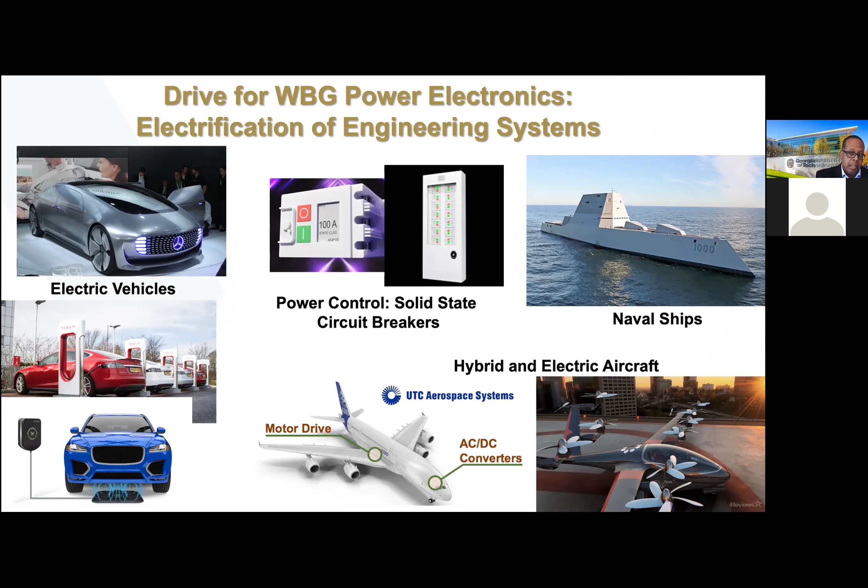We also understand that wide bandgap is being used for RF communications, so you're seeing a lot of that in areas like 5G, radar systems, and satellite communication links. There's also optoelectronics in terms of laser diodes and, of course, white light solid state lighting. I won't talk a lot about the solid state lighting portion today.

I will cover some of the developments going into pushing the technology for RF as well as power. So if I use this slide as a way of motivating, where are we trying to go with our power devices, and why do we need wide bandgap materials?

If you look at a power switch, when it's in the off state, you want it to withstand the voltage being applied without breaking down. It needs to have this infinite resistance, in an ideal state. But when you turn the device on, you need it to switch from that high resistance state to something that ideally would be very low or zero resistance, so that you don't dissipate power while the device is on.

Obviously, this doesn't happen. So during that switching state, you have power being dissipated. While the device is on, you have an on-state resistance that dissipates electrical power, and then in the switching off state, you again have this spike of energy being dissipated.

There's a lot that goes into designing circuitry, but also looking at materials that can minimize some of these losses. This state, when the device is on, is called the specific on-state resistance.

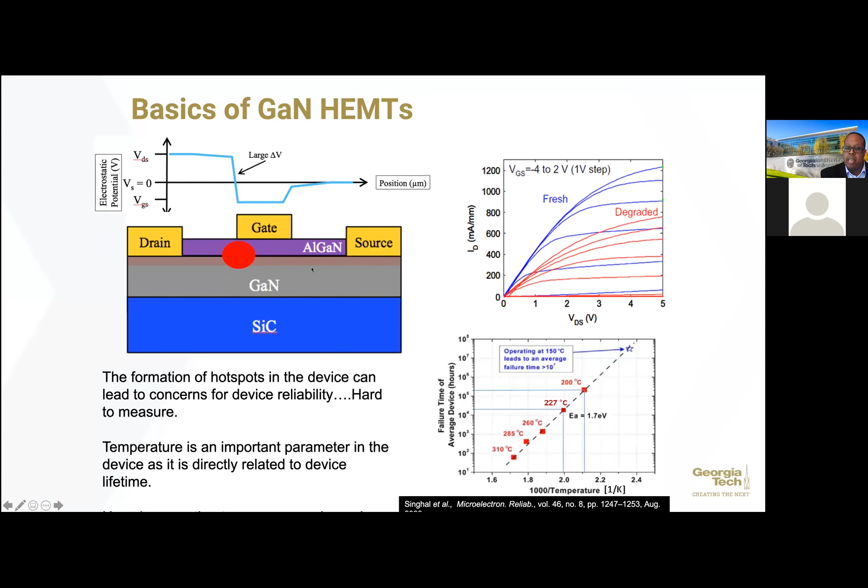What I'm going to deal with today is primarily starting here at the device level. I won't present any of the work we're doing on the packaging portion, and show you where the development of materials and the development of this device architecture really plays into the type of heating you'll see, such as this hot spot right here at the drain side edge of the gate.

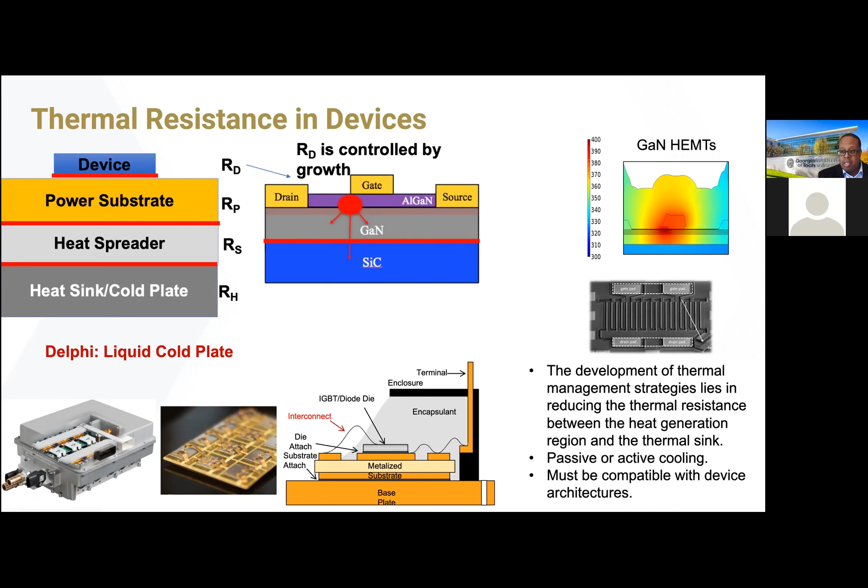This has been done for a while - Hiroshi Amano at Nagoya University in Japan, this is what he actually did in his PhD thesis in order to grow electronic grade gallium nitride. And this is part of the work that led to the Nobel Prize for winning the blue LED, which led to white light LEDs.

So this layer right here is very important that's being put into practice when they grow GaN on top of silicon carbide or other materials.

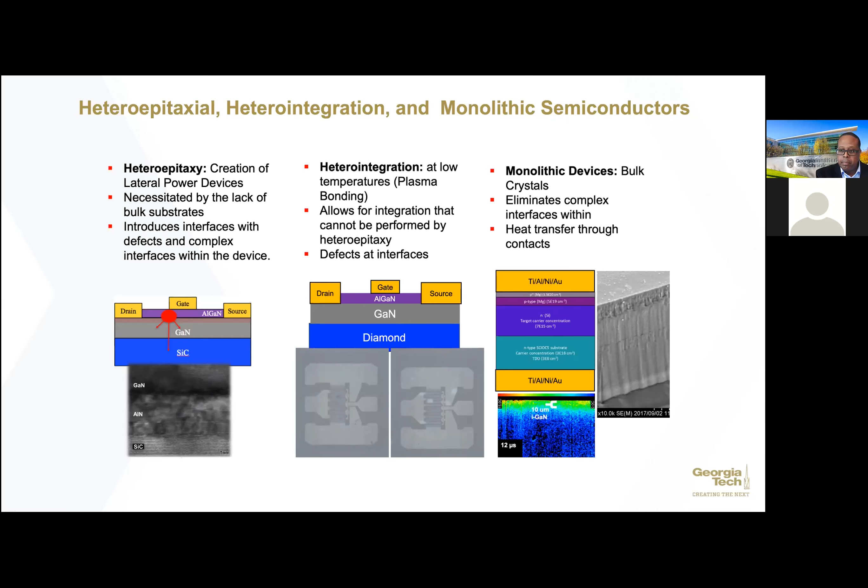So let's start into the materials and manufacturing challenges at the die level. One of the ones that we saw early on in some of our work, this is from one of my former students, Luke Yates, who's currently at Sandia National Labs.

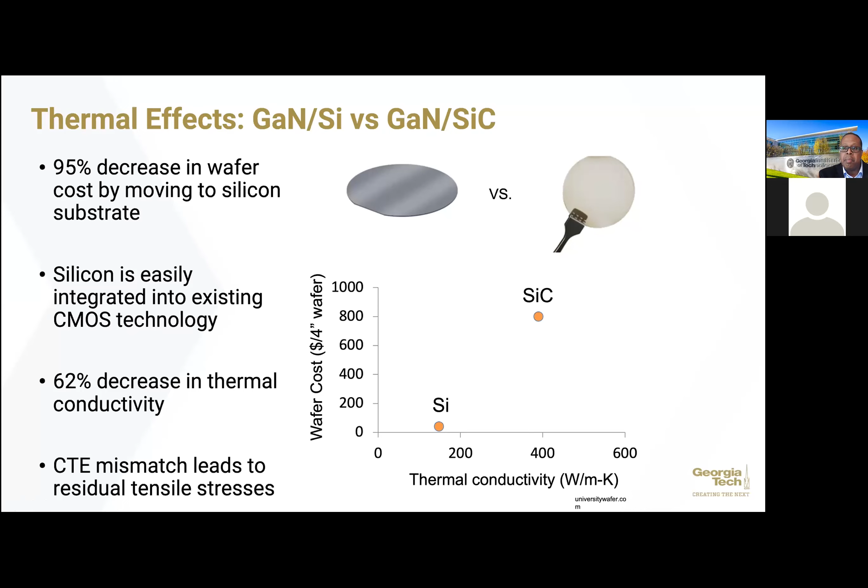But the issue is that the large tensile stresses can lead to crack formation. So it limits the amount of GaN that you can grow on top. If you grow it too thick, you'll actually get crack formation.

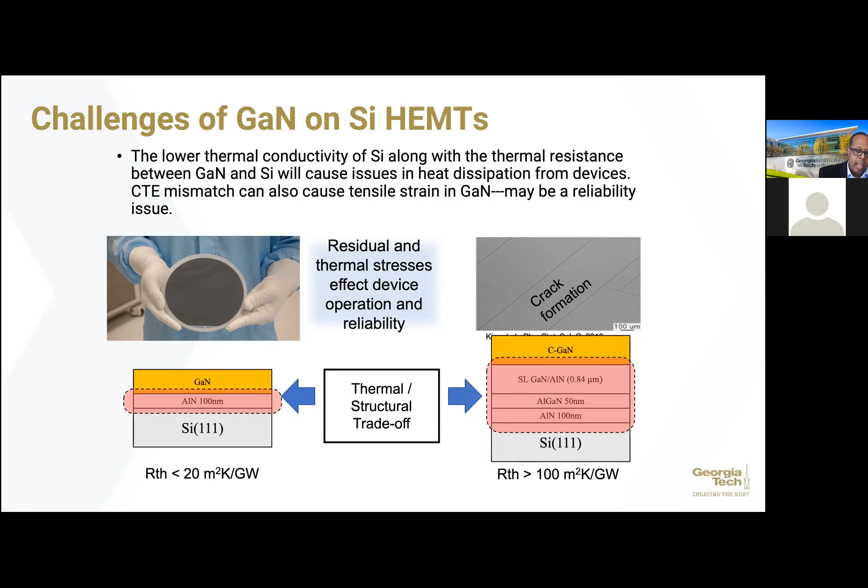So I can grow thick GaN with poor thermal resistance, or I can grow thin gallium nitride with very, very low thermal resistance, and I have to trade off the stresses.

So what we've been able to do, working with some commercial companies, is look at what happens as you grow gallium nitride on top of these superlattice structures, as well as on top of the aluminum nitride.

What I'm doing here is using Raman spectroscopy as well as photoluminescence. Why use those two measurements? Raman spectroscopy gives you the average through the thickness of the GaN. The photoluminescence gives you the stresses right at the surface. So I can begin to look at gradients, the stress gradients, in the material.

The other thing we worry about is that the AlGaN layer, which is about 20 nanometers right on top, undergoes what's called pseudomorphic growth, which just means the lattice of the AlGaN takes on the lattice of the gallium nitride. It's stretched.

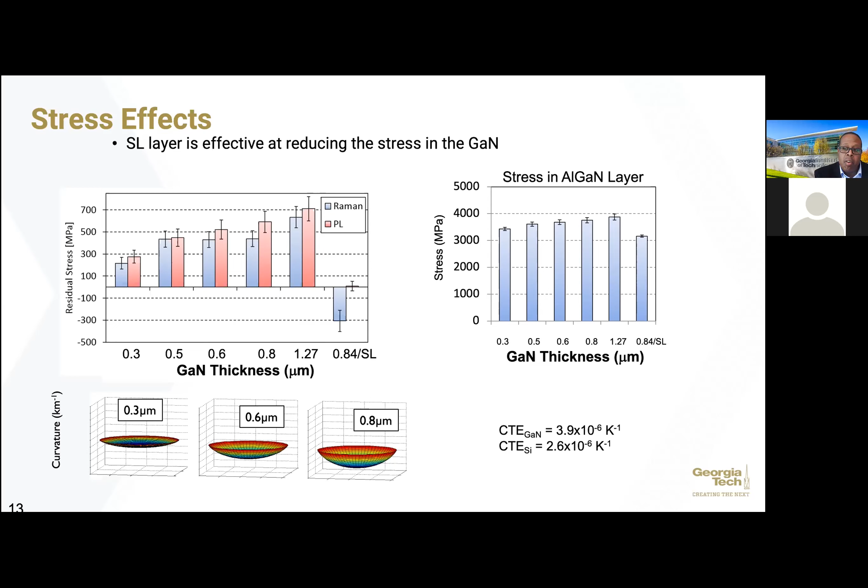That's all we need to know, that it's going to be under tensile stress. So we're basically calculating what the stresses are in the AlGaN layer and how it drops when you get to this pseudomorphic growth on top of the superlattice structure. These are things that are very, very interesting for us to go through to improve the overall reliability of the devices from a mechanical point of view.

So now let's take a look at what happens from a thermal point of view. Here we've used a two-finger device, with source, gate, and drain, a dual structure with two channels so we can do some measurements. These will be sitting on top of superlattice structures to see what happens.

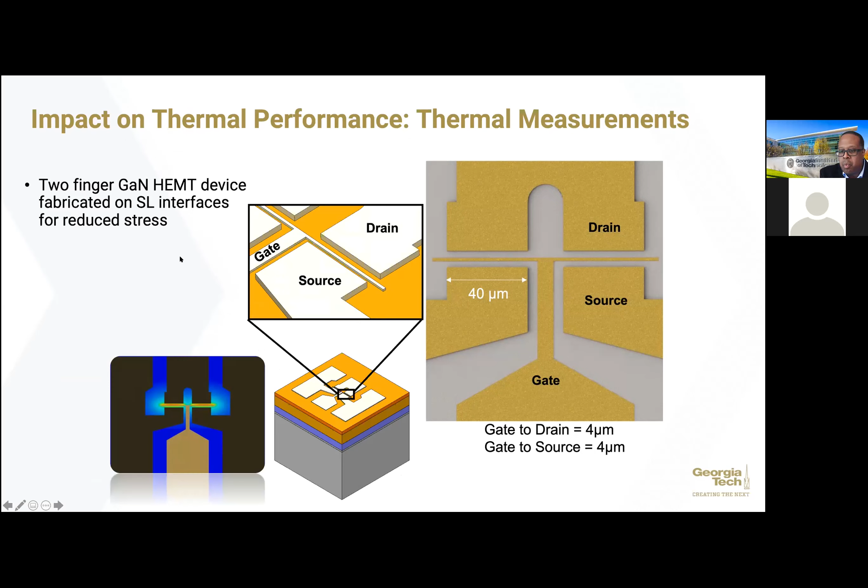We're going to use Raman spectroscopy, a nice technique to measure temperature. When I use Raman spectroscopy, I have a laser that goes through the material since it's transparent to my laser wavelength. I still get scattering with a peak for silicon, and peaks for gallium nitride, two peaks here. I can also put nanoparticles on top, which are TiO2, which don't impact electrical performance. This allows me to measure temperature right at the top of the device, all the way down at the silicon, and inside of the GaN. So now I get a vertical measurement of temperature through the device.

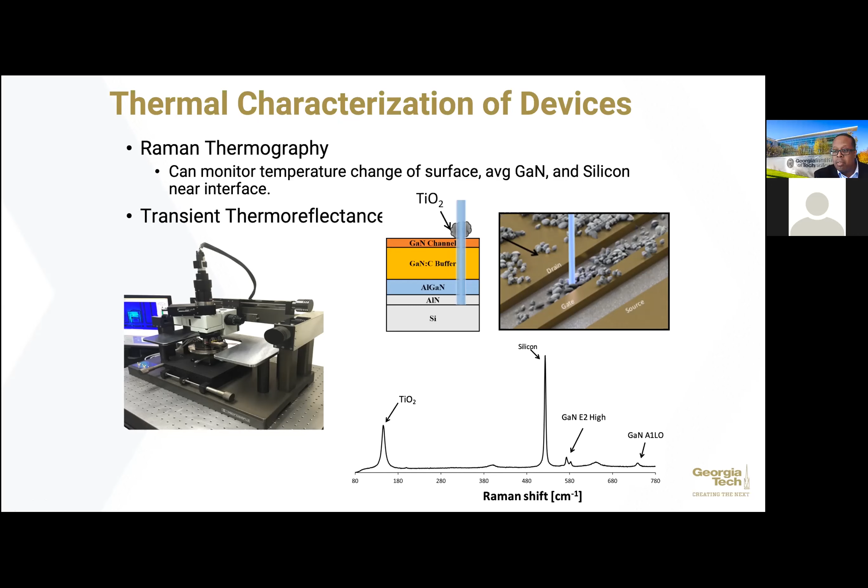Here's what's interesting. I have a 5 micron thick superlattice structure here, about a 2 micron thick GaN layer, and I'm powering this and increasing the power. When I use Raman spectroscopy, I can see the temperature rise in the silicon. Using the same technique, matching the fingerprint to the GaN, you see a much larger temperature rise in the GaN. This is quite interesting.

When I look at the top temperature of the TiO2, this is what you see. The temperature at the very top is slightly larger than the average temperature, which is what we expect. But there's this huge drop between the gallium nitride and silicon, and we believe that's coming from this superlattice structure.

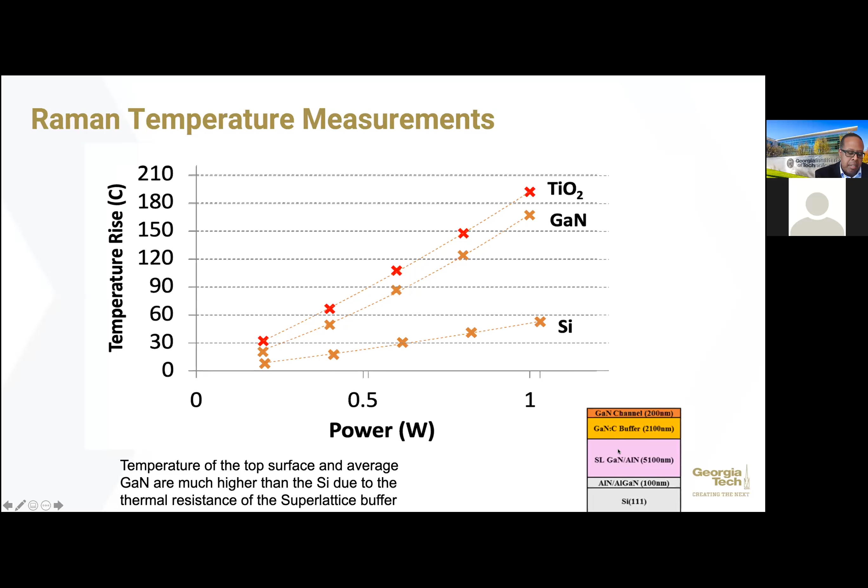So going through modeling and some measurements, we measure the thermal conductivity of the superlattice structure, and it's very low, on the order of 7 watts per meter K. We measure the thermal conductivity of this thin gallium nitride layer, on the order of 104 watts per meter K. Putting that into a model, you see a reduction in temperature between the two. So if I have a superlattice structure, it's going to be hotter than if I don't.

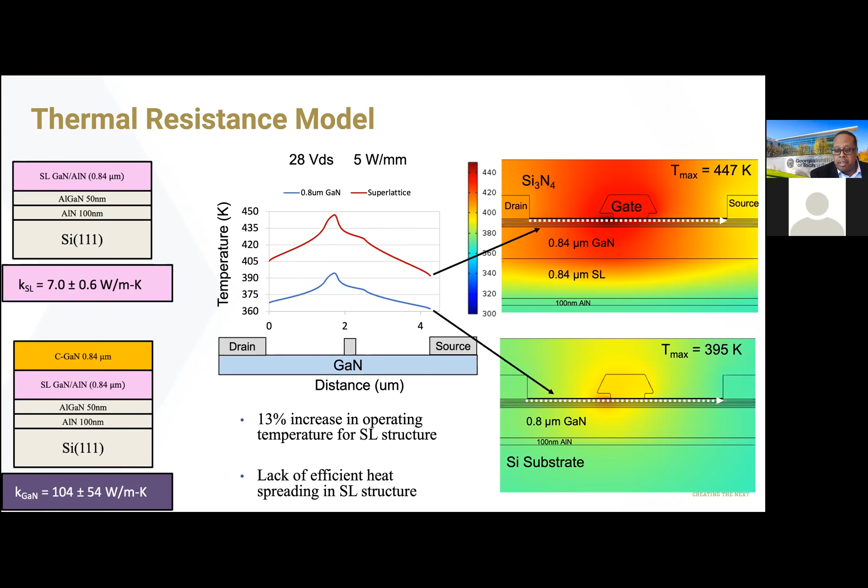But you also see this confinement of the heat really close to the channel region, whereas otherwise it's spreading out. This gives us an idea that we need to build in some heat spreading into the device structure to counteract the need for this superlattice structure, which is basically helping us control stress.

Now moving on to thermal reflectance, what we've been able to do here is use transient thermal reflectance. We're watching this 2-finger HEMT gate structure heat up, in 100 nanosecond time steps, so we do very high speed imaging of the heating of the device. We can also qualitatively see the heating that occurs in the channel, and we'll use this technique to image thermally what happens to the temperature on the gate with and without superlattice structures.

Here's the first one. I have a thick superlattice structure, then I thin this by about a factor of 2, not quite, and you can see qualitatively the temperature is going down. Now I have this AlGaN structure, this highly tensile version, and the temperature is the lowest. This is exactly what we'd expect: thick superlattice structure versus thin superlattice structure versus no superlattice structure, the temperature is dropping.

But this still doesn't help me field these devices with the superlattice structure while cooling them. So the technique here, in order to introduce some heat spreading, is to take the fact that stresses are controlled by having the superlattice structure, and grow a much thicker layer of GaN, which I can't do in the other device, to actually enact heat spreading.

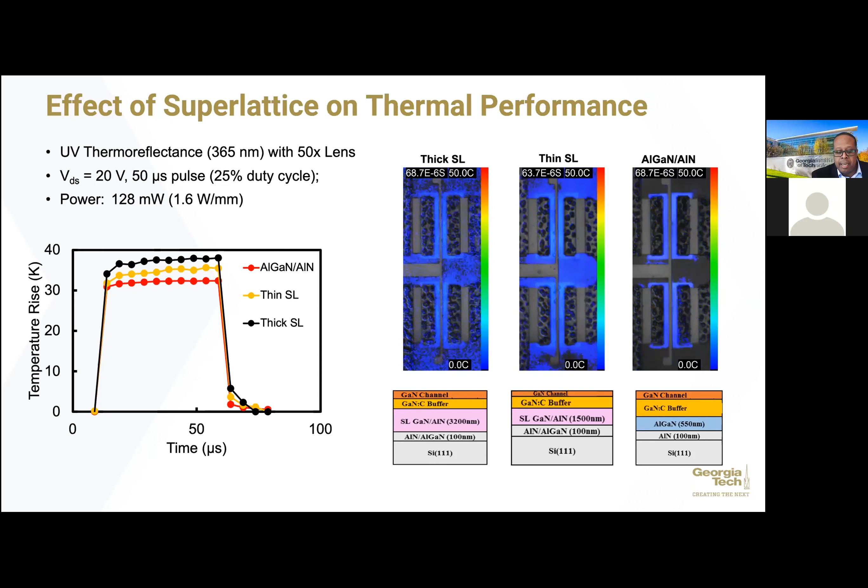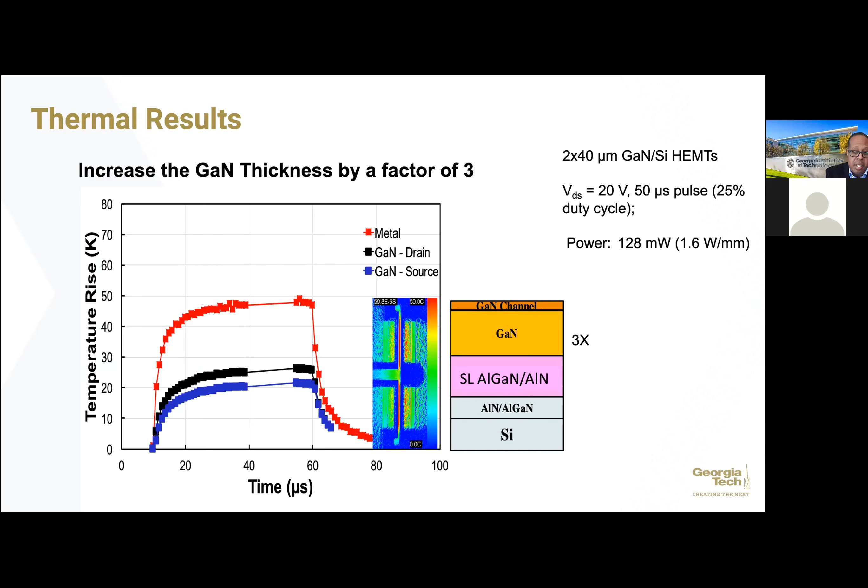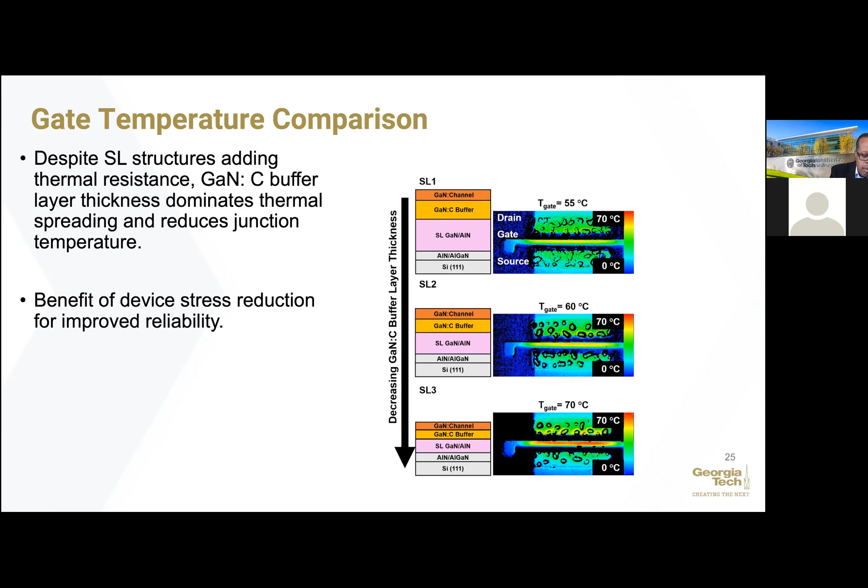Okay, so now I want to move on to something that's a little more high power, also challenging. We're going to move to gallium nitride on silicon carbide, gallium nitride on diamond. What we talked about earlier was the need for this interlayer to help with the growth of high quality gallium nitride for electronic grade structures.

If I were to move to GaN on diamond, I can go from a material with thermal conductivity of 400 watts per meter K to something here that's 2000 or higher, to help dissipate the heat. But this lattice mismatch means I have to put something here in order to do some sort of growth, to have these come together, because I can't grow the gallium nitride directly on diamond and get electronic grade material. So these interfaces play an important role.

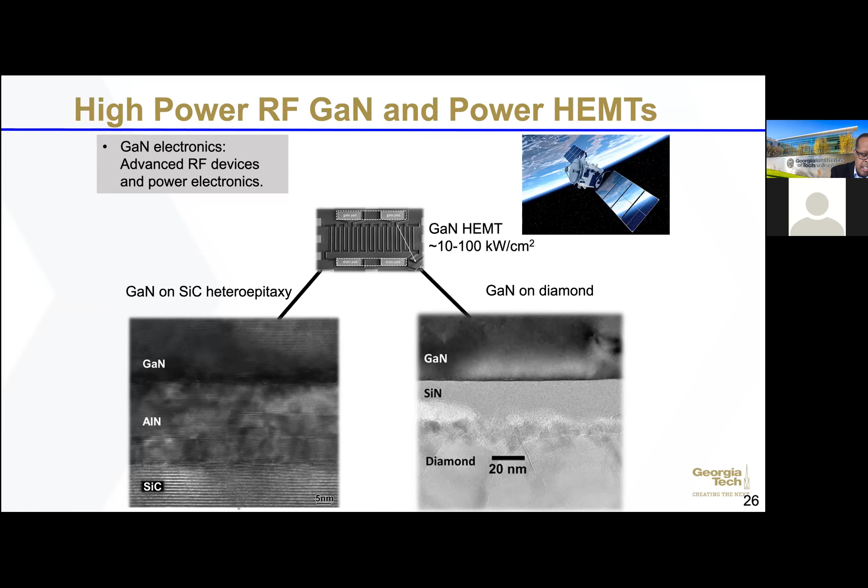One of the things we looked at in our research: first, we know we can make high quality gallium nitride on other substrates. Can I remove that and actually bond it directly to silicon carbide without this interlayer?

This is done through what's called plasma activated bonding. We're interested in this technology because, as shown on the right, we can do this at wafer scale. This is actually what's done to some degree in SOI wafer production. So can you adopt this for heterogeneous integration of two electronic materials that you typically don't grow together, or can't grow together in the fashion you're trying to bond them?

So here we have gallium nitride grown on sapphire. You can take this, use an argon ion beam to activate the surfaces, place them together under pressure, and then do a laser liftoff of the sapphire. Now you're left with this gallium nitride on this substrate.

You can then do a smart cut to remove some of the gallium nitride to make it thin. We did this portion to make it thin in order to do thermal measurements of the thermal boundary resistance between the GaN and the underlying silicon carbide.

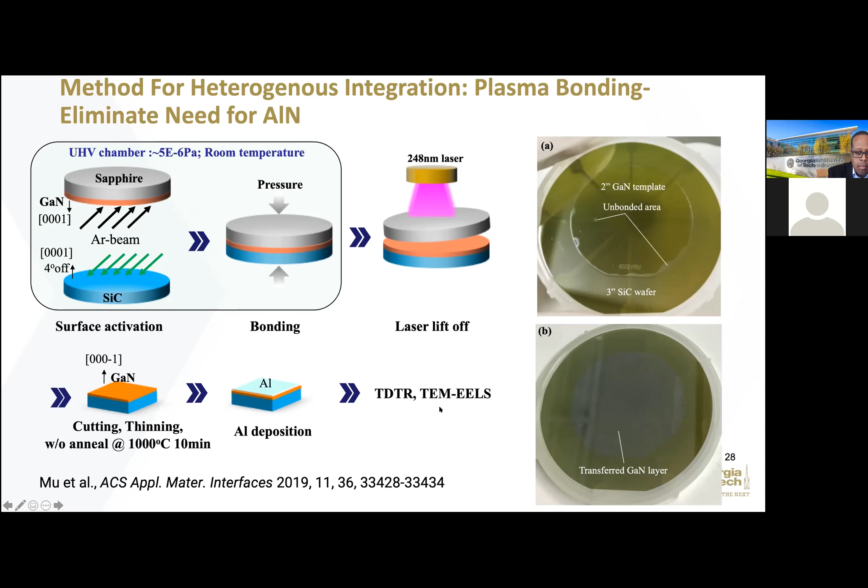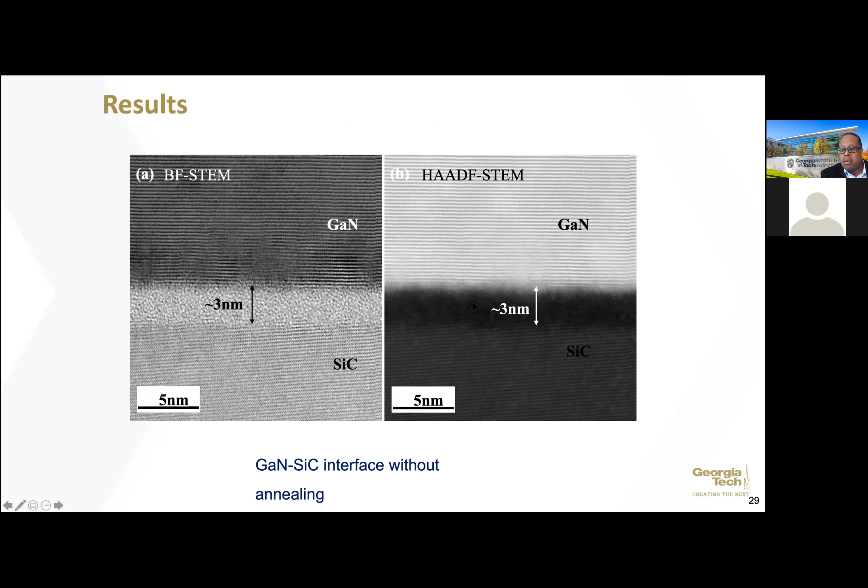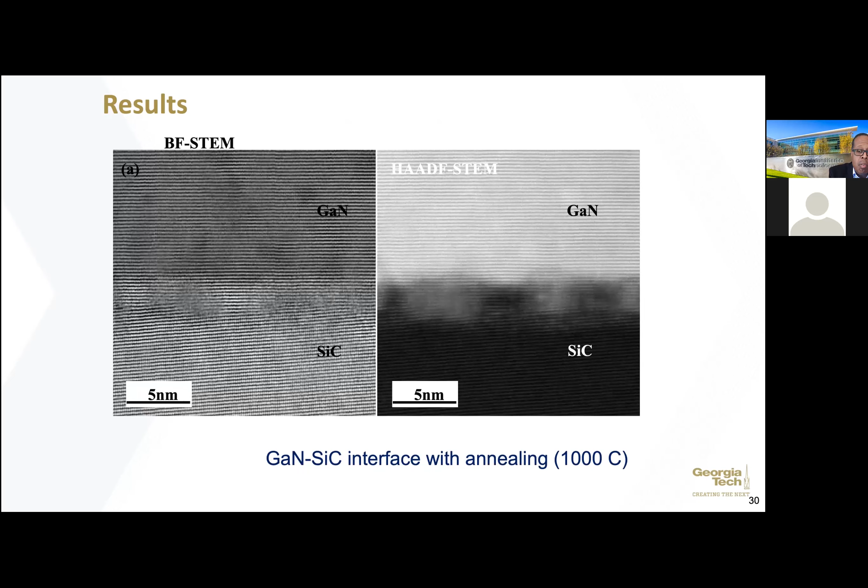The interesting thing here is that we're trying to get rid of the interface of the aluminum nitride, but in doing this plasma activated bonding, you end up damaging this interface and getting an amorphous region of silicon carbide. So we still don't get away from having this interfacial region between the two materials. What you are able to do is anneal this at about 1000 degrees C, and you start to get recrystallization of this interface. It's still not perfect, but this is something that can be worked on in terms of the manufacturing processes to improve the overall interface in terms of crystallinity.

The other aspect is that if you go and do TEM imaging plus chemical mapping, you can also see that we found argon atoms actually trapped at this interface. This is sort of discontinuous after the annealing. If you don't do the anneal, it's actually a continuous layer of argon that's trapped here at the interface.

And so there's still some room to understand what this might be doing and how that might play a role in the recrystallization as well as the thermal aspects of these interfaces. But again, this is looking at the limitations you have in terms of a wafer scale process in terms of bringing these together.

Now here's the nice information we're able to find out. When I grow this material on sapphire, I can actually grow high quality gallium nitride that I can then bond directly to this silicon carbide layer. If you do MBE growth directly on silicon carbide, you actually get a lower thermal conductivity because it's not the electronic grade version. So we're able to get fairly good thermal conductivity of this particular layer.

But what you also see is this comparison at the as-bonded stage. If I look at the thermal resistance, or the thermal boundary conductance, between the GaN and the silicon carbide, it's lower than if I grew it with MBE on the aluminum nitride on top of silicon carbide. So I'm not doing any better here.

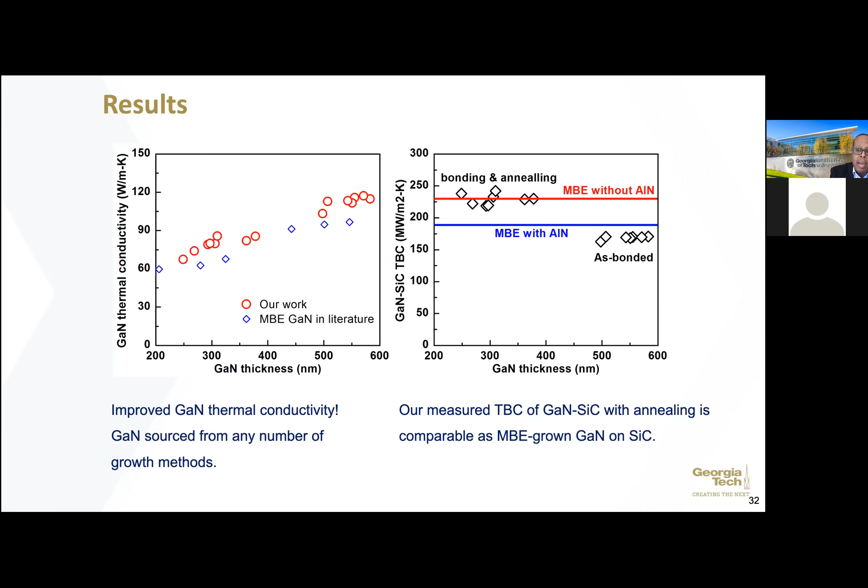But after I do the annealing, what you see is that we end up getting values that are very high, on the order of what you would see with MBE growth directly on silicon carbide in terms of that thermal boundary resistance. So this work, again, this was from Zhe, who's currently a postdoc in the Cahill group. You can see that this is one of the highest values we've seen for thermal boundary conductance from gallium nitride to silicon carbide.

But yet in this particular case, we do have the electronic grade material that could be used to make devices. What this also points to is that this plasma activated bonding, which we've actually tried with other materials, which I won't have a lot of time to go into, can be used to integrate, mix and match other semiconductors with high thermal conductivity substrates.

So it's opening up this toolbox to begin using manufacturing techniques to integrate thermally dissipating substrates, or heat spreading substrates, with these materials that are actually producing a lot of heat from joule heating when the devices are operating.

One of the things I have to admit though is that what we've shown you here is GaN bonded to silicon carbide. Typically, if you're going to go and produce this, because of the polar nature of GaN, when it's grown on sapphire you want to have this surface up. So typically what you'd have to do is go back, bond this to a handle wafer, and then take this and bond it to the silicon carbide and take the handle wafer off.

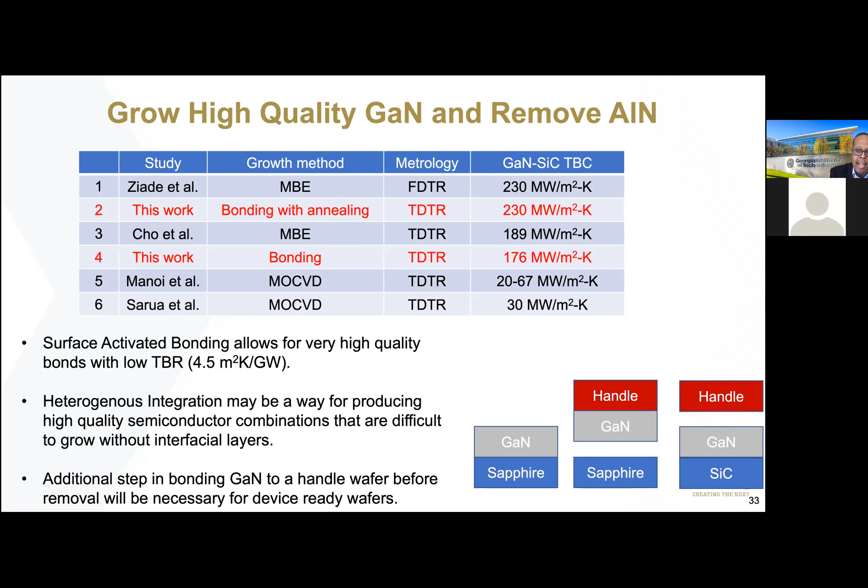We did not do that in our research experiments, but this is something that can be done in industry, as an extra step. It's currently being done with GaN on diamond, and I'll show you some of that in the next set of slides.

Again, let's go back to our carrier wafer that I mentioned before. I have my GaN that's grown on silicon carbide or aluminum oxide. I'm going to bond it to this carrier wafer, and then what I'm going to do is remove it. So there's various techniques to remove the gallium nitride.

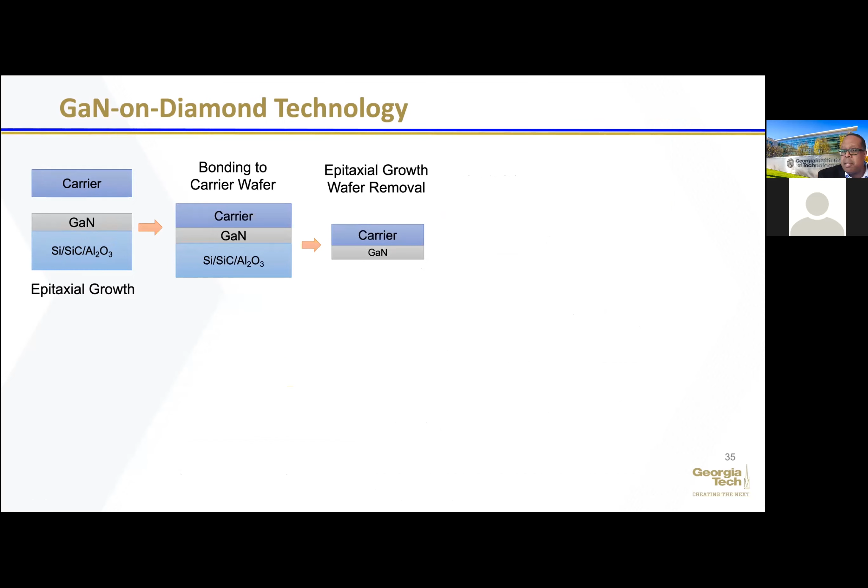And then in one case, I'm going to place diamond seeds on the back, and I'm going to grow diamond on the back of the gallium nitride. This is probably the more common technique that you see with people producing GaN on diamond. And then you remove that carrier wafer.

In the other case, I would have this on the carrier wafer, and now I'm going to do bonding. As I showed you before, plasma activated bonding, trying to get rid of these interfaces. And now I have a transfer bonded GaN on top of diamond.

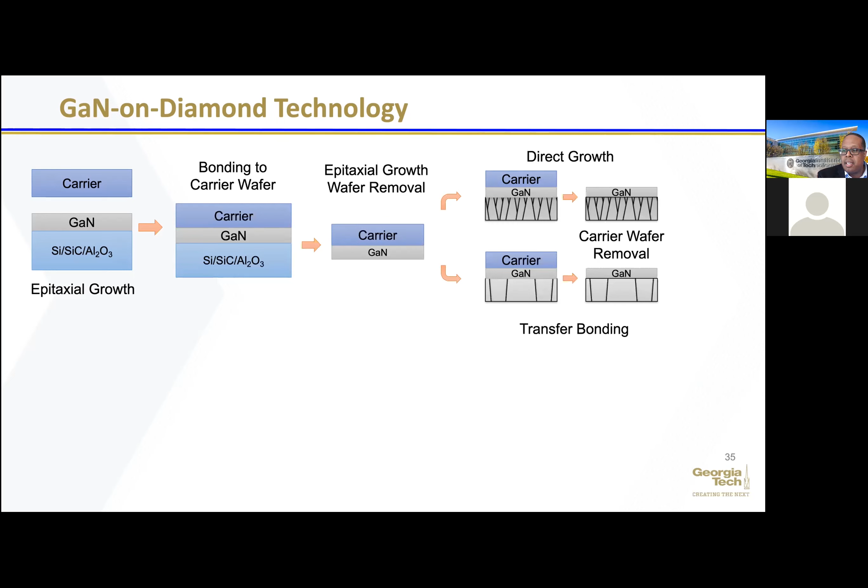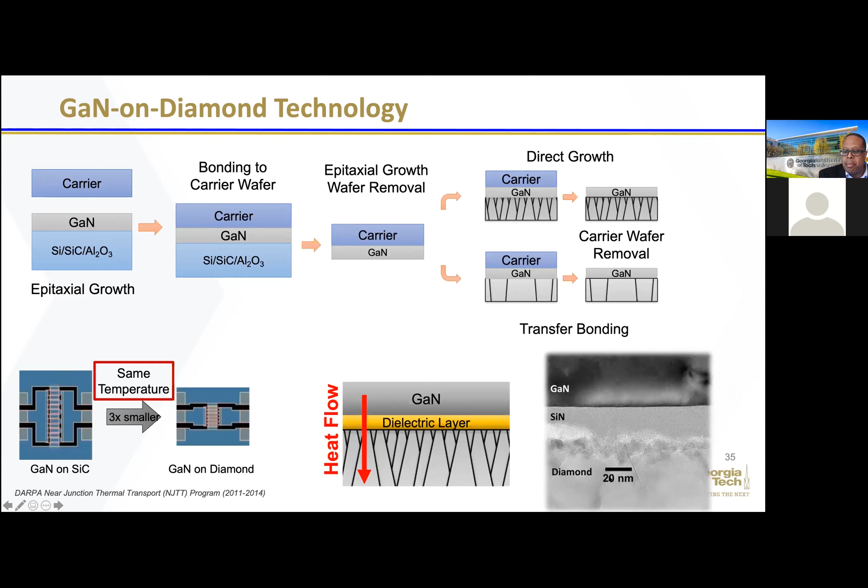What we do see, again, these interlayers, this is what is causing a lot of the issues or the limitations in terms of moving heat from the GaN into the diamond. Even though this is a very high thermal conductivity material, this is what you have to worry about. So what we've done here is looked at the impact of some of these interfaces on the thermal transport behavior.

So I have GaN, I have diamond, I have the silicon nitride, which is commonly used. We said, what if we take the silicon nitride and just thin it down to 5 nanometers? What if we replace the silicon nitride with aluminum nitride, 5 nanometers? And then what if we take this sample and don't have an interlayer material and grow the diamond directly on the gallium nitride? What happens?

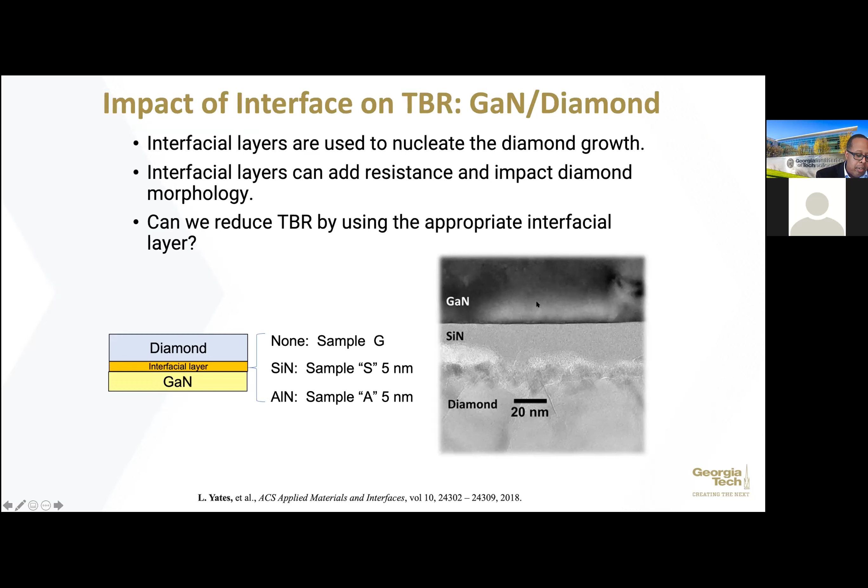So what's happening? If I try to get rid of that thermal interface altogether, based on just handbook calculations, you would say that the thermal resistance should go down, but it's actually going up. Well, the hydrogen that's in the plasma from the diamond growth actually begins to eat the gallium nitride, and so you introduce defects. This is why you have to have some sort of interfacial layer there when you're trying to grow directly.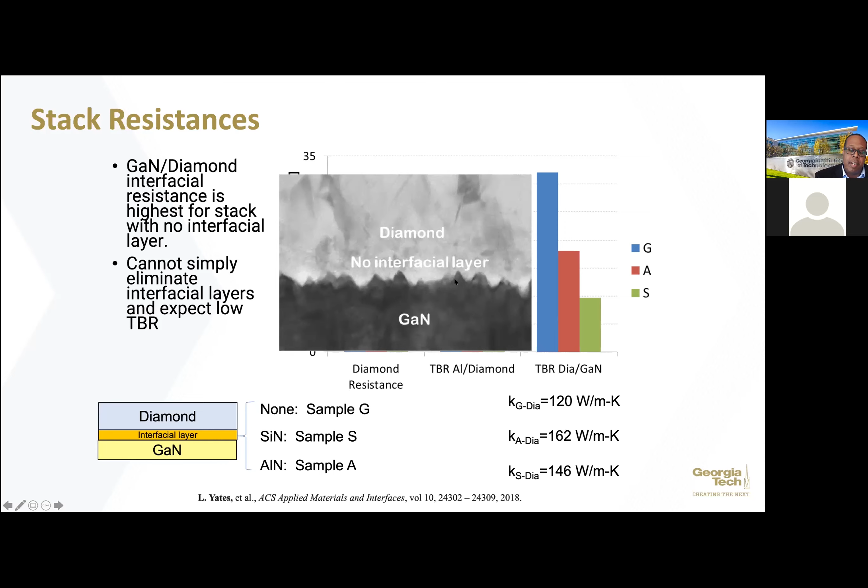When we do aluminum nitride, we've seen some areas for this particular sample that's been etched, that's been removed. So you get some unevenness there. We think that's where that thermal resistance is coming from. I will say Martin Kuball's group in Bristol has worked on this a bit more, and they've been able to make this better, but this is at the time when we published, this is where we were.

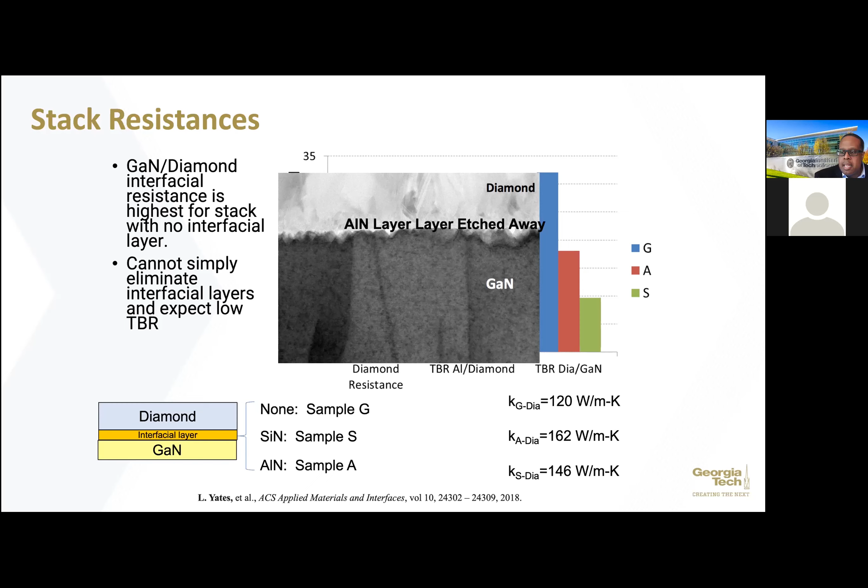And then you get to silicon nitride, and it has the lowest thermal resistance. So what is happening here? What we ended up seeing is that this 5 nanometer thick layer of silicon nitride actually had, you can barely see it has some etching, but it only etches down to about 3 nanometers in thickness. So you still have that silicon nitride layer that remains.

It's very thin, and this leads to some of the lowest thermal boundary resistances that we've ever seen between GaN on diamond. Thermal boundary resistances on the order of 10 to 12 meters squared K per gigawatt, or in terms of conductances, between 80 to 100 megawatts per meter squared K. I want you to keep that number in mind, between 80 to 100, as we go to, obviously, how would you bond these?

That's the other step. Can we do it the other way? So here's an aspect of taking gallium nitride. We want to remove the silicon nitride, and we want to bond directly to diamond. Well, that's actually not so simple.

So what we try to do in working with our collaborators is place a layer of silicon on top of the GaN, a layer of silicon on top of the diamond, plasma activate that and bond it, or you mix a silicon containing precursor in the plasma, so you co-deposit the silicon while you're activating the surfaces and bond. This is work that was just published last year, and we're able to successfully bond the materials together that way.

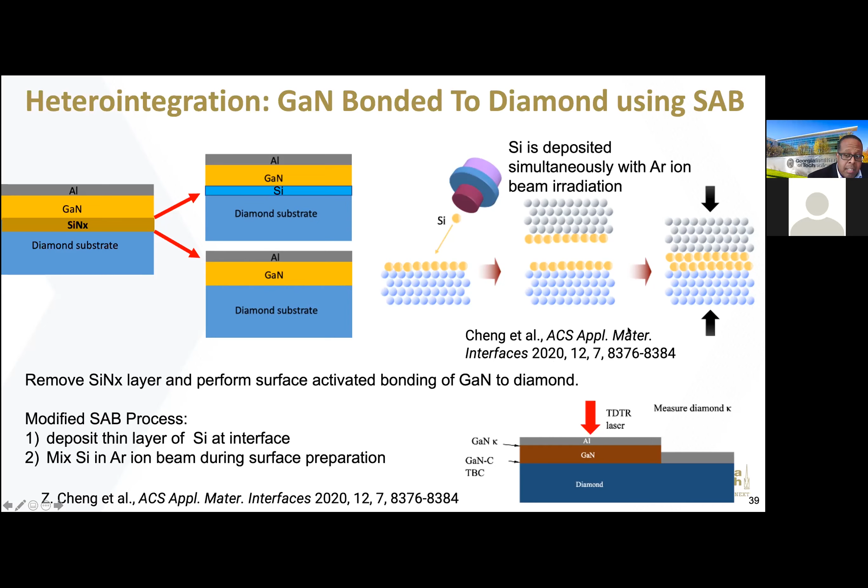So this is what you see. If I deposit the silicon layers here, you basically get some amorphous layers that are actually occurring. You typically see this amorphous carbon here. You get some more amorphous areas, and you get the silicon layers.

If I do the in situ approach, you will also see, I don't have the TEM showing you, there's still some amorphous layer here. You get a very thin layer of a silicon containing material. But what you do see is that for this sample here with the thick interlayer, you're down here around 60 megawatts per meter squared K.

Remember before I said some of the best was between 80 to 100. And now when I do this thermally activated bond, this plasma activated bonding, I'm sitting here around 90, right in that sweet spot of some of the best thermal interfaces reported. There's still a lot of room to grow in terms of dialing in these process parameters to control the amorphous layers. In this case, we're not annealing it to get rid of this amorphous layer. So there's quite a bit we can still try to do with plasma activated bonding to produce extremely low thermal interface resistance combinations of heterogeneous materials.

So another thing that comes up, going back to what I said about GaN on silicon, we were worried about stresses. Here, we're also going to worry about stresses with the diamond. So we're going to use a couple techniques, number one, Raman Spectroscopy.

I showed you before, I can get these two gallium nitride peaks, and these peaks will move with both temperature and stress. When I do this measurement with Raman spectroscopy, I do it at room temperature, so any shift in the peak has to come from the stress component. We see a shift in the frequency of the phonon peak that is linearly related to the stress in the film, and we've gone through and figured out these correlation factors, the K here.

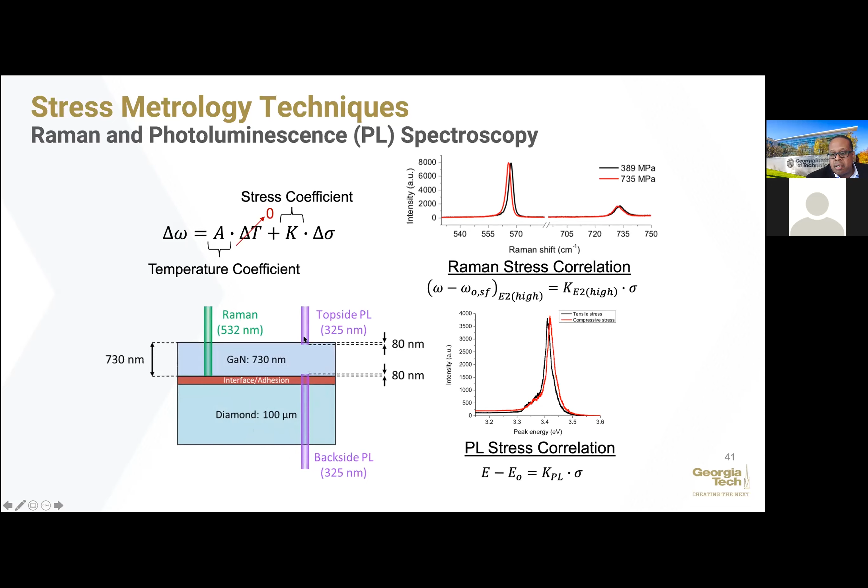So here I have my gallium nitride on diamond. What's nice is that the diamond is transparent to my UV laser, so I can measure the surface stress right at the back side with PL, and also right at the top side using PL. I can measure the average stress through the thickness.

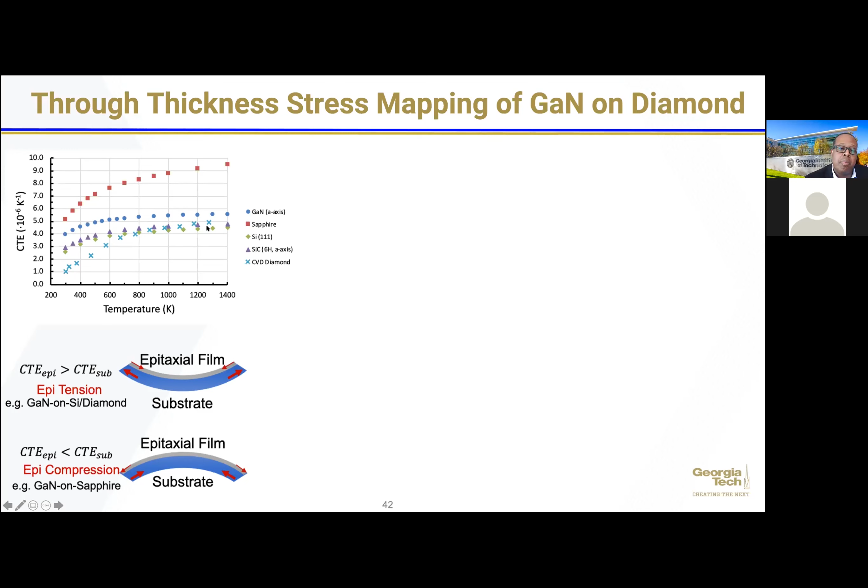Using this technique, we know that if I have a film where my epitaxial layer has a CTE higher than the coefficient of thermal expansion of the substrate, my film is going to be in tension. So if I grow GaN on a material like silicon, I know I'm going to start out with a tensile material. If I grow GaN on sapphire and try to transfer and bond it, I'm going to start out with a compressive material.

And that's what you see here. When we start out, we have GaN on silicon epitaxy. I do the transfer bond, even at low temperatures. What we see are these very large stresses that can exist in the gallium nitride from the growth. I'm going to get to the transfer bonding next, but for the growth, I get very, very high tensile stresses near the top surface.

It can go compressive. There's a lot of work on dialing this in to reduce these stress gradients. As I grow GaN on top of silicon epitaxy, I use that to then grow the diamond on the backside, removing the carrier wafer from silicon. This is what you're seeing, these large stresses in these devices.

If I grow GaN on silicon carbide and do a low temperature bond, the stress gradients are much smaller. Now, if I do the plasma activated bonding I showed you earlier with that silicon interlayer, what you see is the stress gradients are really small, but now I've flipped it to being compressive.

I'd say these are fairly early results. We haven't quite published all of these yet, but we're in the process of trying to figure out, from a manufacturing point of view, we know we can combine with diamond and that gives us very good thermal performance. But now, how do we go through our manufacturing techniques to begin dialing down those stresses while still keeping a very good thermal interface?

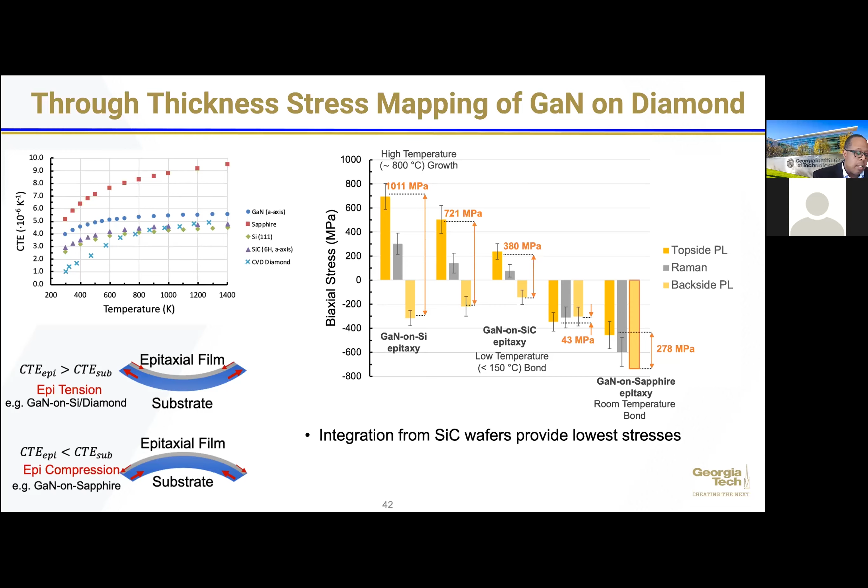And so these methods of using photoluminescence and Raman spectroscopy come into play a very important role for the stresses, as well as the TDTR and the transient thermal reflectance for understanding the thermal response, as well as the thermal properties as we do this heterogeneous integration.

So now I want to move into the very last portion of the talk, just to give you some future stuff. When we move from GaN, which I've talked about mostly this entire talk, we want to start looking at beta gallium oxide, which a lot of people are jumping into, and aluminum gallium nitride, which there's even a call out now from the Army Research Office on this material.

The interesting thing, as I said before, is that we look at the specific on-state resistance for power. As you start moving up your band gap, we saw that there's this benefit, so I won't go over this again because we already talked about it.

But beta gallium oxide, what's nice is that it's grown from the melt, so you can get fairly good large area substrates. Not necessarily cheap yet, but it's readily available. You can buy these commercially, doped with various dopants, even semi-insulating. There's this nice push in terms of the thought that the price is going to come down, but there's still a lot of work to be done here. I'll show you the challenges next.

And then AlGaN - you can grow these on aluminum nitride and sapphire, which are, again, readily available. And again, you look at current densities - the current densities of AlGaN transistors actually can be higher than that of gallium nitride even today.

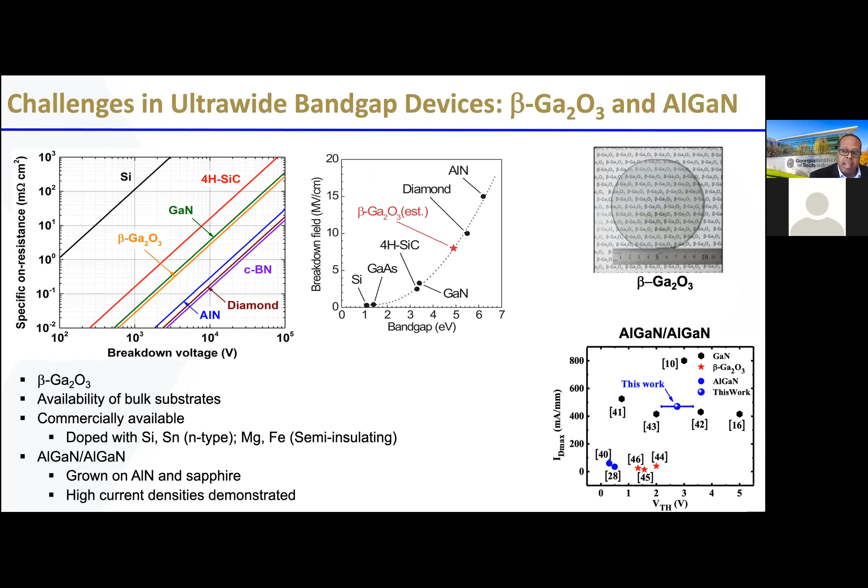These are very interesting things, but when you start looking at where we start running into problems, the thermal conductivity of beta gallium oxide - now we're talking about it being highly anisotropic. The highest thermal conductivity in the 010 direction is on the order of about 26 to 27 watts per meter K. This is 10 to 100 times smaller than other wide bandgap materials.

When we move to ternaries like aluminum gallium nitride or aluminum gallium oxide, we're only finding a very few reports in the literature that even talk about the thermal conductivity of these materials. AlGaN materials, the thermal conductivity is closer to about 10 to 15 watts per meter K. What we have seen with AlGaO is that the few reports, the few numbers, they can be as small as 3 to 5 watts per meter K.

This is a measurement that was done by Z, where this is a superlattice structure with just a 10% AlGaO composition, and this superlattice stack was about 4.7 watts per meter K. So there's still a lot of unknowns in terms of what the thermal properties are, the temperature dependence, the thickness dependence, and the compositional dependence of these materials.

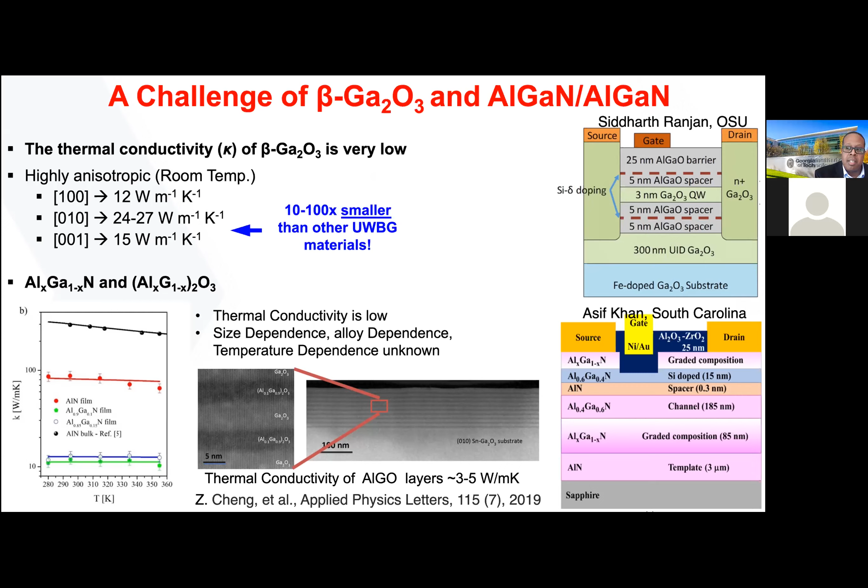And what you're seeing are a number of device structures that are going to be dependent upon having these ternary oxides or ternary nitrides as they begin to push towards high RF or high power device level operation. So there's still an open area of research that needs to be done here for these structures.

We have looked at - if you can't really manipulate and increase the thermal conductivity of these materials, which we're not going to do, what you have to look at is the overall packaging structure, the packaging architecture. This gets into: can you just simply take gallium oxide and put it on top of diamond and cool it like we're doing with gallium nitride? Well, the answer is yes and no.

If I have a very thick layer of gallium oxide, the majority of my thermal resistance comes from the gallium oxide, and it really doesn't matter what I put down here, because this is going to cause my thermal resistance, which is going to raise my temperature. But if I make it really thin, you can see that as I make it thinner, the substrate thermal conductivity comes into play. So that's the structure that we saw mostly with gallium nitride.

But the other way to do it is to basically package it where you have a thermally dissipating substrate very close to the top side of the device. You're looking at underfill materials and other things like this, so that way you can dissipate the heat out through this structure. And that's where the current areas of research are, in terms of developing new materials to enable these kinds of architectures.

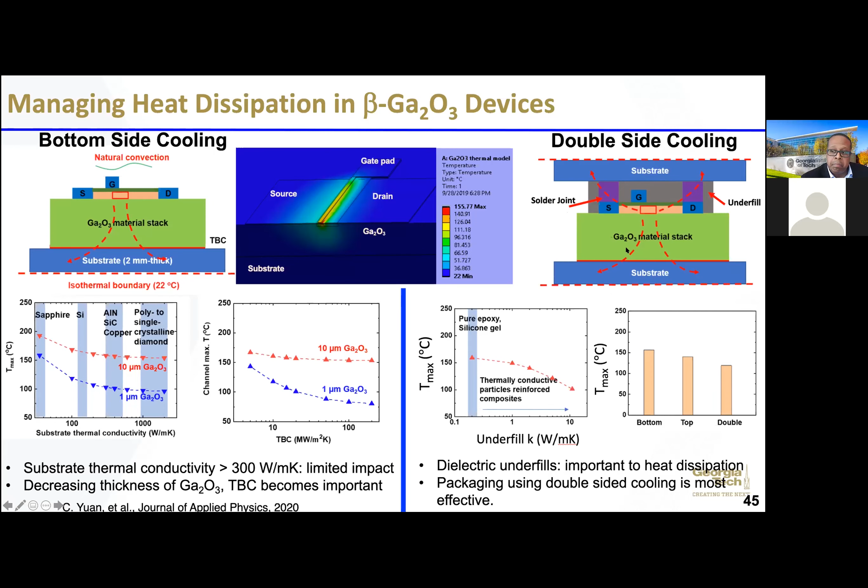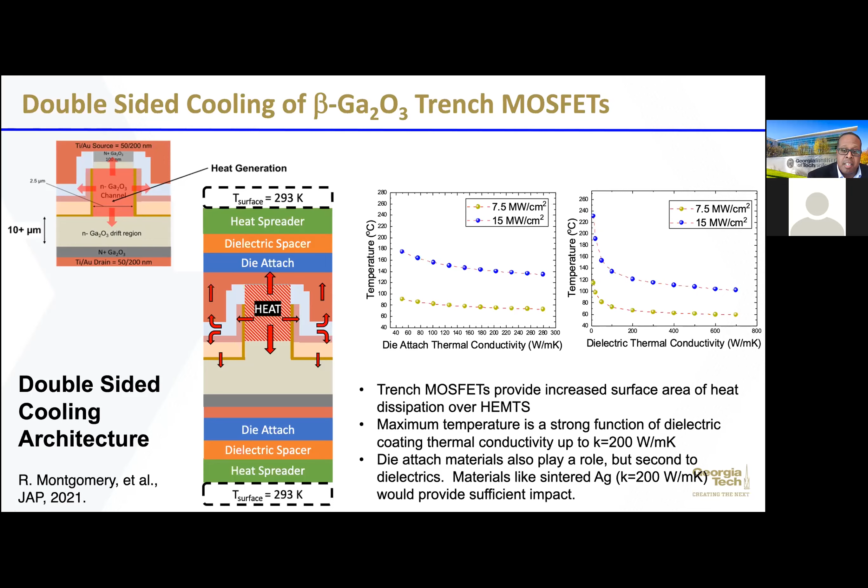The other option is to, instead of using lateral devices, go to fin structures, FinFET structures - we've seen this in silicon. These die-attached materials are for pulling heat out of the structure, and thermal conductivity plays a role at higher powers. But the dielectric material you put inside is where you'll see the biggest benefit. Most of our dielectric materials are around 1 to 2 watts per meter K. If I can create dielectric materials with even a slight increase in thermal conductivity, you'll see temperature begin to drop quite a bit. So for these trench MOSFETs or FinFET structures, this is where a lot of the action is in terms of where we go next.

Then you start looking at contacts, these metal contacts. Here we've actually been able to do the same plasma activated bonding, taking gallium oxide thin layers and transfer bonding it over onto silicon carbide. We've also been able to do this with diamond. And you could also look at direct MBE growth on silicon carbide. This actually gives a slightly better interfacial thermal resistance for gallium oxide growing directly on silicon carbide than even the bonding approach, because of these interfacial materials.

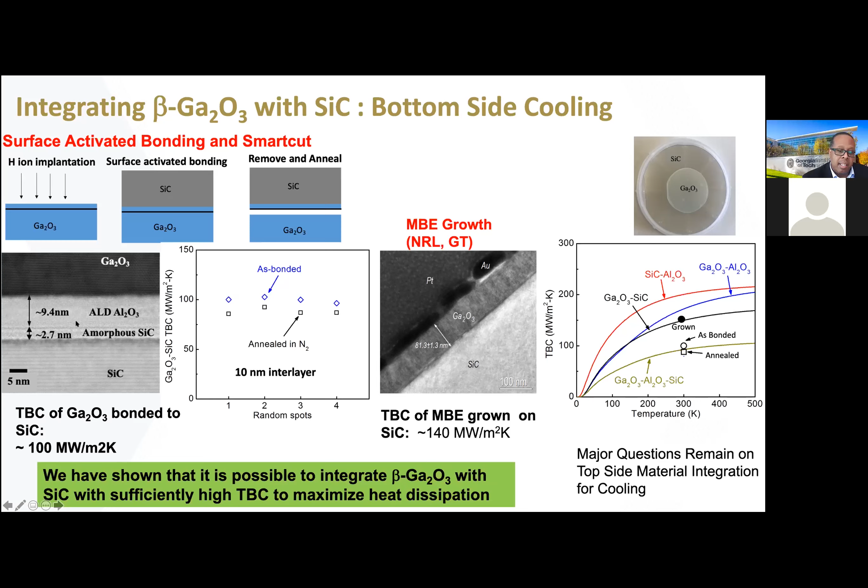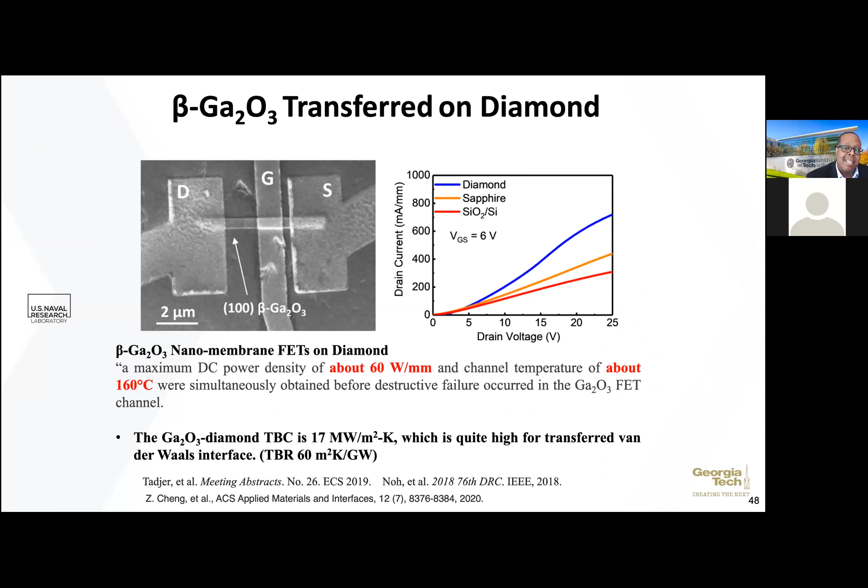This is some work where we placed this on diamond, done with the Naval Research Laboratory. They were able to achieve power densities of 60 watts per millimeter with these transferred over to diamond. However, the thermal boundary conductance here is only 17 megawatts per meter square K. We believe you can dramatically increase this in order to improve the overall heat dissipation from these structures.

So I want to start wrapping up. The last thing I'll mention is as we begin putting metals down, we can deposit metals by things like E-beam evaporation, or we could also deposit metals by MBE. The interesting thing we've been finding in our work is that when you deposit metals by MBE, you actually get a dramatic increase in the thermal boundary conductance. Part of this involves looking at the chemistry at the interface of how the metal is interacting.

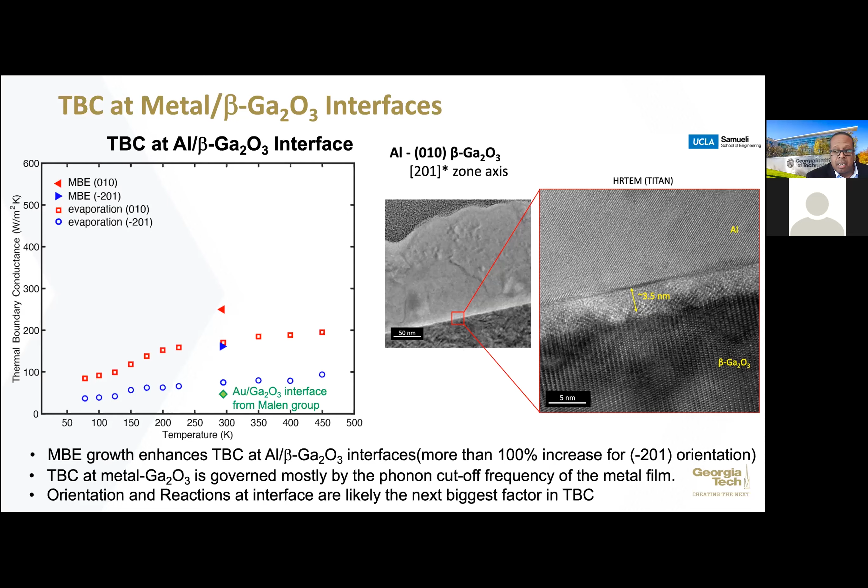With materials like beta gallium oxide - it's not just beta gallium oxide, we've seen this with other materials as well, depending on how we're depositing it and increasing the thermal boundary conductance. But with beta gallium oxide, you start getting these interfacial reactions. So again, how do you control these reactions in order to maximize the thermal boundary conductance on these particular structures?

I'd like to conclude now and have the chance for any questions, but hopefully what I've shown you is that wide bandgap semiconductors are being pursued because of the promising figures of merit, also the growth in availability of some of these substrates like beta gallium oxide. There's a lot being done to push these technologies for the future of RF power, as well as optoelectronic devices. I didn't talk about solar blind optoelectronics that can be done with beta gallium oxide.

However, as you can see, there are some challenges. Knowledge of material and structure property relationships, mainly the thermal conductivity and thermal boundary conductance, along with co-design methods where we consider the electrical performance, the mechanical behavior, as well as thermal - this is going to be key to pushing the technology forward. We can't just design a thermal solution and hope the other two will work out. Manufacturing for heterogeneous integration will be an enabler for future technologies.

We're looking at plasma activated bonding, and other growth techniques for how we will actually put these various materials together and understand how they will behave inside the device. These require a lot of material science modeling, as well as the kinds of measurements we've been doing. And finally, in order to make beta gallium oxide and AlGaN technologies work, it's going to require aggressive cooling technologies that are integrated at the chip level.

And this is a wide open area. It will require a true multidisciplinary effort between teams of scientists and engineers, and this is where we're trying to have a lot of fun today.